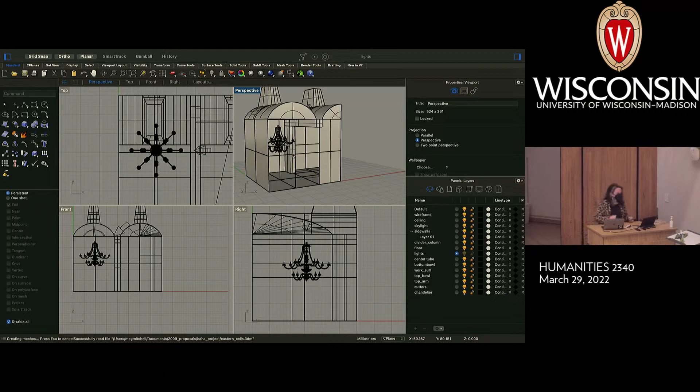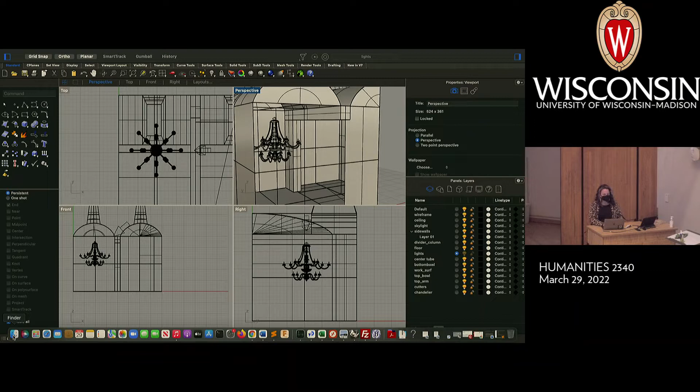So let's get the mood music off. As promised, I was challenging myself to show you all a Rhino project per session. This is a project I did a couple years ago, actually a proposal. I could probably teach a whole class on proposals I've done that never got selected, because that's a huge part of being an artist. You have a ratio of things you send out for submission versus things that actually get picked. You don't get picked to do a large public art commission every day. If you're doing this type of work, you're preparing a lot of proposals and not getting any of them, or getting very few. And even if you're getting very few, you're actually doing really well, because sometimes hundreds and hundreds of people will apply for these opportunities.

So me and my collaborator were interested in doing work that had to do with the Innocence Project, where people find out, many years past a crime, that someone is actually not guilty, using scientific evidence to prove that. So I generated this big chandelier, and I don't think you can see it here, I think I actually did it in post. I strung a bunch of rhinestones from it that looked like they were in the form of a DNA molecule. So anyway, this was the work.

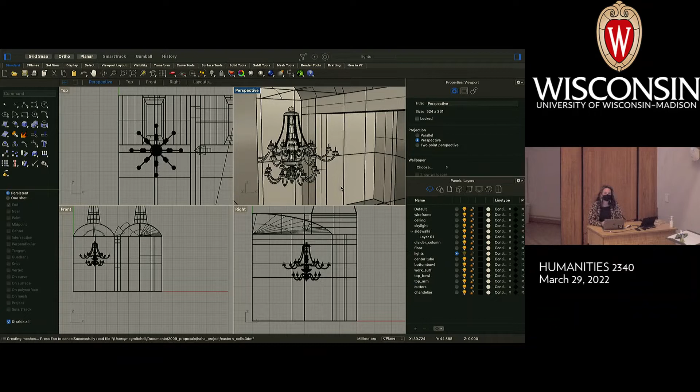It probably took me, well, we actually went there for a site visit to look at the space, me and my collaborator, and then it probably took me another couple of weeks to do this. So is it worth it? Is it not? Gosh, I don't know. I mean, I have gotten some of these projects, and that makes the next ten I don't get worth it. So, yes, a note about rejection.

It happens to everyone.

Today we are going to get into Rhino in a different way. We're going to talk about some broader concepts related to 3D modeling, and then we're going to try them out in Rhino. Then I'm hoping to pivot about halfway through the session and talk about how to make things with freeform curves, which is edging into the next assignment.

So we spent some time last week really talking about how the Rhino interface works. We'll be talking about that the entire time we're using Rhino, because it's kind of just something you have to learn. And then we also talked about the ideas of using solids and modules for your Modules Galore assignment.

So what we want to talk about is just a bird's eye view look at 3D modelers. It's possible that y'all have heard of some of the 3D modelers out there on the market right now. They're apps, pieces of software that you can choose to use. Of course, I don't think Rhino is necessarily the most popular one. It's been around for a really long time. But as I said, one of the reasons we chose Rhino is because it's a little bit lower on the cost and tends to be a little bit better for what we do as a department.

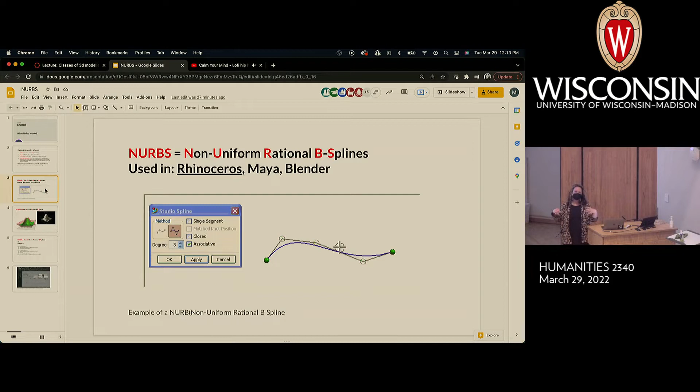So splines actually come from the tradition of shipbuilding. Just to honor that tradition today, I'm going to make a boat in Rhino. No joke, when the Vikings, or anybody else for that matter, used to make ships out of wood, they would set up systems that would use blocks to push the wood in one direction, and wood being somewhat bendy, the wood would eventually comply with that. That architecture used to make wood curved is called a spline. That's your fun fact for today.

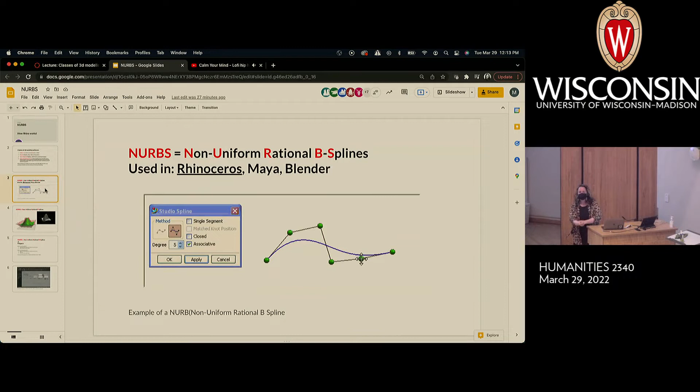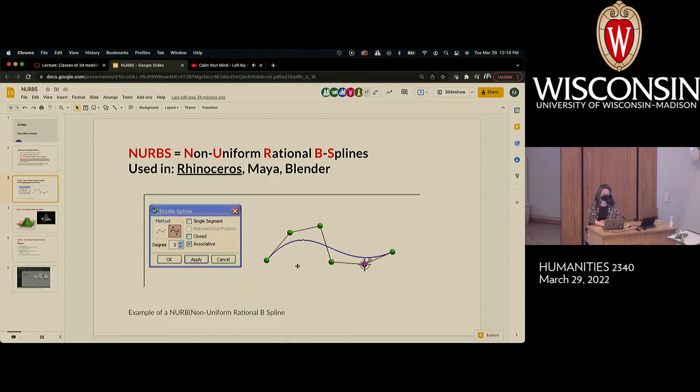So now, everything in the computer world is sort of explained by its relationship to the physical world—at least a lot of things are. So when people took on this project of making freeform curves, they decided to borrow from that physical world approach. And so what you get, as you can see in this slide, are these sort of malleable freeform curves. So that, in a nutshell, sums up NURBS.

There's also another type of 3D modeling out there called polygonal modeling. I'm not going to talk too much about the use cases for all these different models—I just want to go through them, and we'll talk about use cases in a couple of slides. Polygonal modeling is really what dominates the so-called cinematic effects software packages like Maya, 3D Studio Max, Cinema 4D. There's a whole bunch of them, like Houdini. There's literally probably at least a dozen of these software packages out there.

There's also another method called surface subdivision modeling. Back in the old days, 10 years ago, there used to be some apps that would do surface subdivision modeling, which is a somewhat exotic mathematical approach to creating 3D form. But now, I think today it's something you'd see mostly in plugins. I know there's a plugin for Rhino that does surface subdivision, but I'm including it on this list because it's a very technologically distinct way of creating 3D stuff. It's distinct from NURBS, and it's also distinct from polygons.

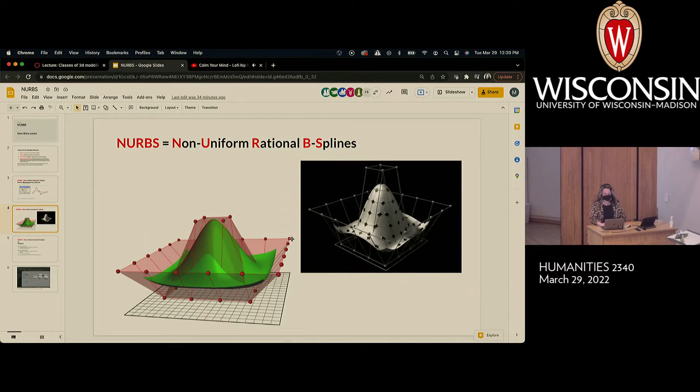So yeah, this is what a NURBS in 3D would look like. So this is a NURBS surface. And you can see it's still controlled by those splines and anchor points, but it's doing that in a 3D way. Let's talk a little bit about what's good for what. Right now, in this class, we're pretty much modeling for the screen. So that's a perfectly legitimate reason to use NURBS.

What are NURBS good for? Well, definitely I would say NURBS are good for anything made to be part of the built environment, short of maybe an actual building. Then you should use AutoCAD, if you're an architect, basically. But if you're just making stuff, building stuff, designing stuff, NURBS is the way to go. Another thing that NURBS are legendary for, and definitely their main function, is that they're ridiculously accurate for smooth surfaces. And I'm going to demonstrate why in a few seconds.

So what are polygons used for? What are they good for? Polygons are really good for rendering quickly. And I'm going to say something that is a little cheeky here, but that's about the only thing they're good for. No, that's not really true. They're great, obviously, for games, for video effects, basically anything where you need the computer to mush through the 3D data really quickly.

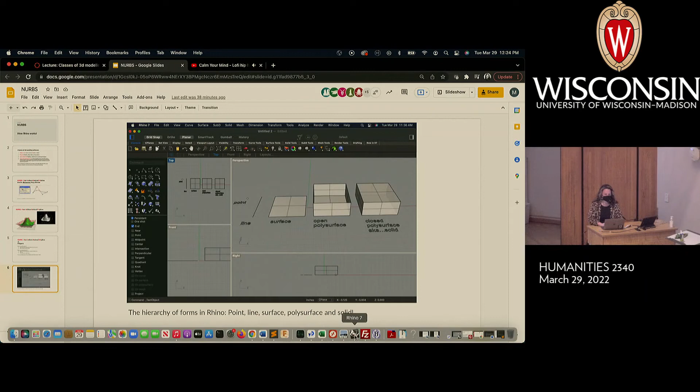So let's jump into Rhino. Excuse me, I don't know why I'm opening. So let's talk out the hierarchy of form, and we'll also talk out some of those format issues that I brought up earlier.

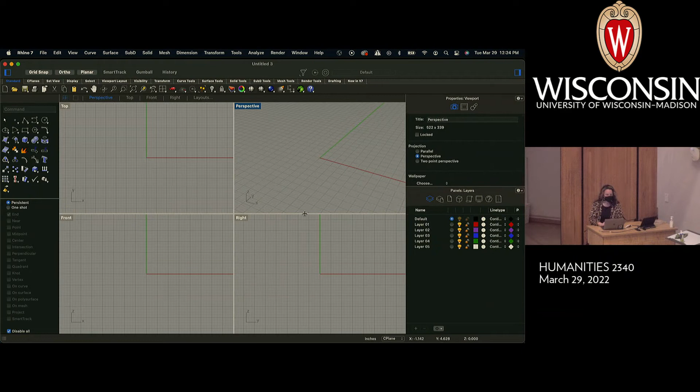I'm going to jump into my 4-viewport layout here. I can start by drawing a line. We all know about the line. I could start with just a flat line or a polyline. Actually, I think I'm going to jump straight into the curve, just because it'll get things done a little bit faster and curvier. So I'm going to make a single line here.

And you can see right now my setup is in ortho, so I'm constrained. That's okay. Pro tip, if you hit the Shift key, it will temporarily turn off ortho. I tend to keep mine like that because I work a lot with right angles. If it doesn't seem important to you, don't worry about it. So if I hit the Shift key, it allows me to go anywhere. And I'm going to just draw a couple of points.

The curve tool can take some getting used to in Rhino. As you can see, you're actually drawing the control points, not the points on the line themselves. So you have to anticipate where the line is going to go. It's not super hard, it just takes a little bit of getting used to. So making some line drawings by yourself is probably a good idea.

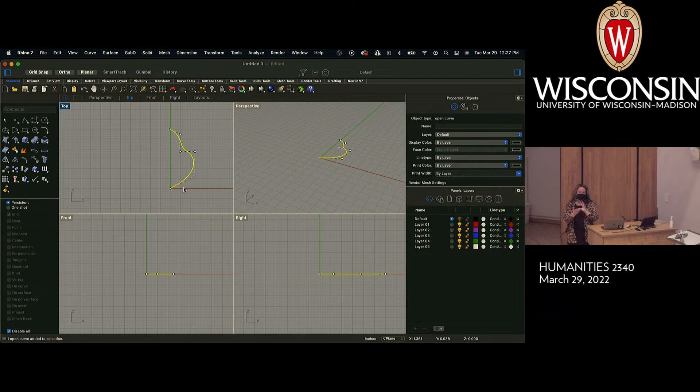We're going to take this line and use a method that turns it into a surface by spinning it. If we had this point over here somewhere, it would create an open surface. But as it's set up right now, where those 2 points are on the same axis, it should generate a closed surface. So up here in the menus at the top of the screen, you can see there's a curve menu, a surface menu, and a solid menu.

Those are like your go-to menus for basically making stuff in Rhino. They're going to have most of the functionality that you need to model stuff. So right now we want to probably go to the Surface menu because I had mentioned just a second ago that I wanted to make a surface. So if a surface is what you want to get out of the operation, you probably will want to try the Surface menu. It's a good rule of thumb.

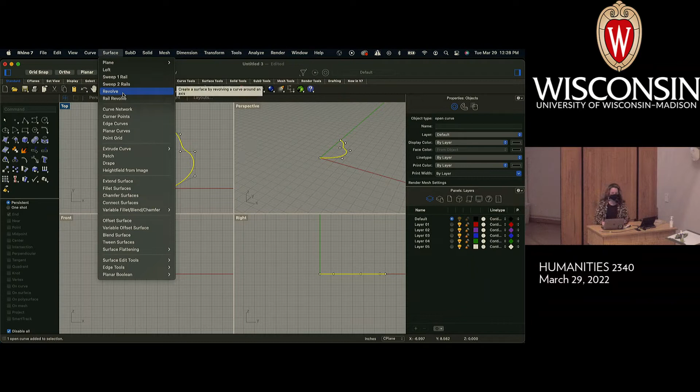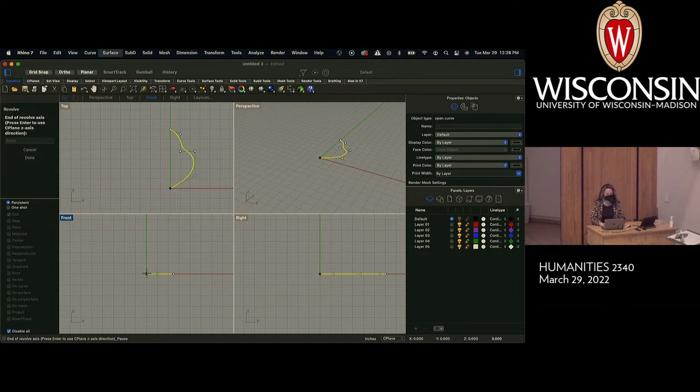I'm going to use the Revolve method, okay? So with the Revolve method, you basically define the start of the axis. In this case, I think actually the front viewport is where I want to define the axis. So I'm going to click on this point right here. Now that's the start of the axis, and then the end of the axis should probably be somewhere over there. And that's because, as I pointed out to you, I put those 2 points lined up to each other, anticipating that I would whoosh that around in that direction.

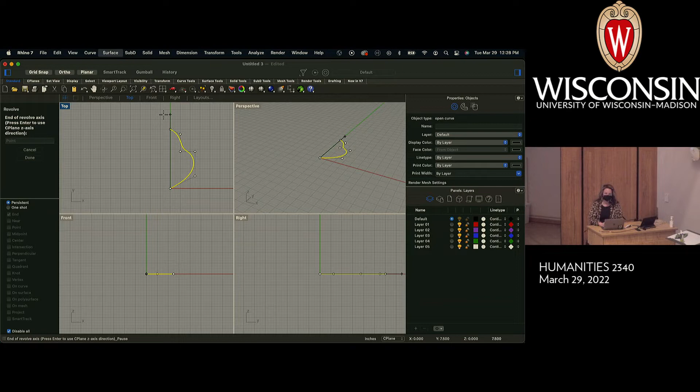Can we do it in other directions? Absolutely. Interesting things will happen. But let's do it the uninteresting way first. So then, after I have a start and an end to the axis, it asks me for a start angle. You can do a revolve partially and make it just like a fan or a shell. We actually want to do a full circle, so I'm going to click the full circle box here. And you can see it did something.

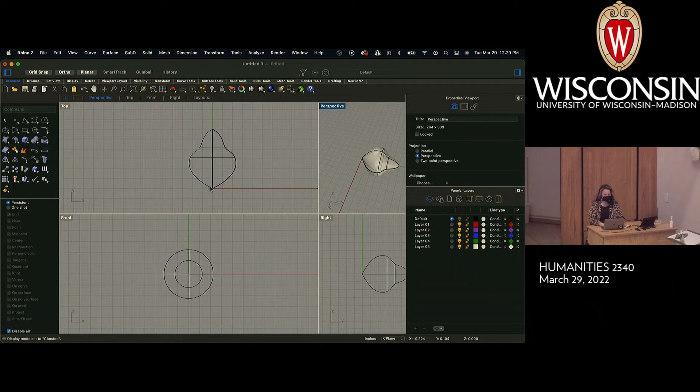Now, I can't tell exactly what it did because I have not set up my viewport yet, so I'm going to hit Control, wait for the menu to come up, and select a more shaded viewport. So that's cool, fantastic. So this looks like we've jumped straight ahead to a closed polysurface. I'm going to go ahead and make this as an open polysurface just to show you, or an open surface, rather.

Oh, by the way, did everyone see how I didn't like how that point was coplanar to the end point down here? And how did I do that, everyone? I clicked it, and I dragged it. So it's that easy. Any point on a curve line, you can manipulate post drawing. I deal sometimes with students who have a lot of anxiety about the curve function and not getting it right. And my advice would be, don't bother getting it right because you can just move the points around after you make the line, and then you can get it exactly the way you want.

When you're in the middle of an operation in Rhino, it's not a great time to go back and question your actions. Rethink your life, maybe. I don't know. So let's see.

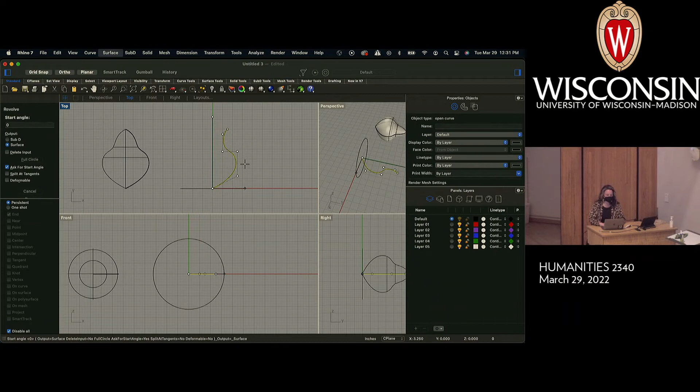I'll just do the Revolve method again here. And again, it's asking me for a start and an end axis. When I'm doing these start and end axis functions, it's a really good time to glance at all 4 viewports and just make sure that it's here, here, here, here. Because obviously, if it's not where you want it, it's not going to turn out the way you like. And so in this case, I can also do a full circle here. And so now this has produced an open surface.

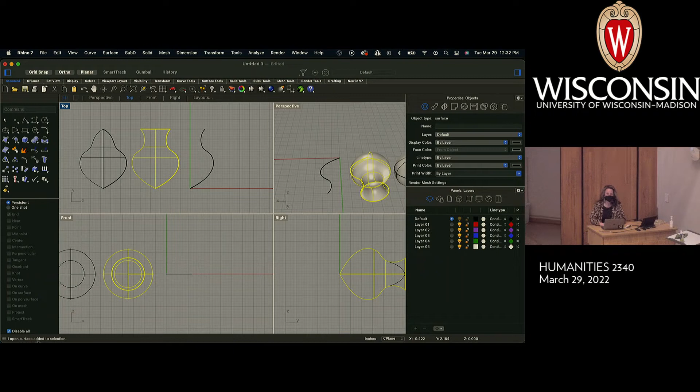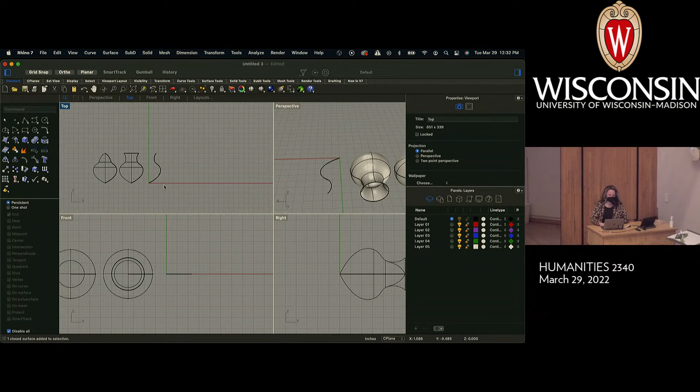So if I go to select both of these things, it says 1 curve, 2 surfaces added to selection. That sounds about right. Sometimes this will say whether something is an open surface or a closed surface. And so if we click this individually, it is reporting back that it's an open surface. So this little readout down here can be a good tool to just know what you're dealing with. OK, so now we've got a point, a surface, an open surface, and a closed surface. So that is that.

And now we're going to take it 1 step further, and we're going to think about these as objects that we would like to 3D print. So that is going to involve a couple of things. We're going to go into the Mesh menu. And as you guessed it, the Mesh menu is where you will find most of the functions in Rhino related to polygons.

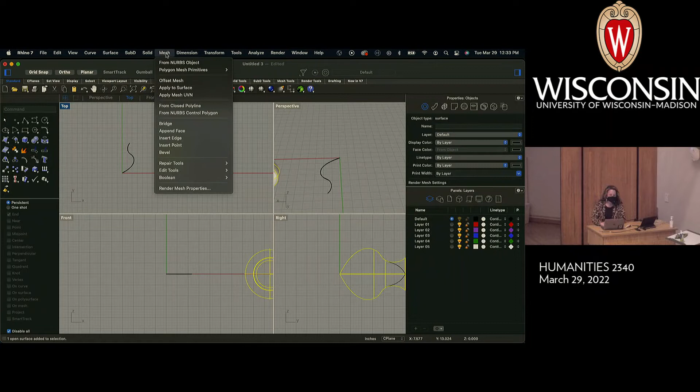As I said, is Rhino great at dealing with polygons? No, not really. But it's fine for certain things, and this is one of the things it's OK for. So we're going to basically pretend that we're making a 3D print. And I can go ahead and just make a mesh right here in Rhino. This isn't exactly the workflow that we would use if we were 3D printing, but we'll go ahead and go with it.

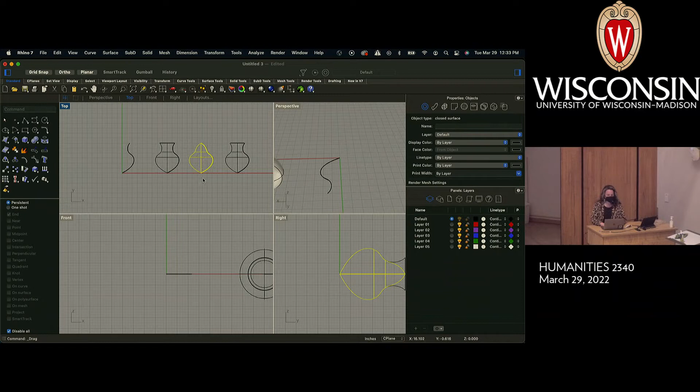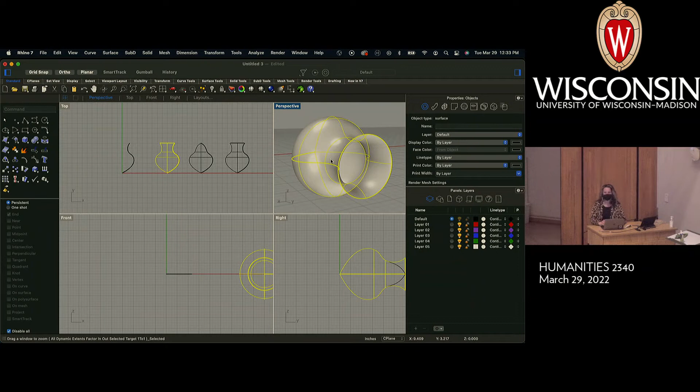Now, fun fact, this open form that's a single surface. Let me do my zoom selected thing again. OK. So is this form 3D printable? No, it's not. I can certainly show you how to make it 3D printable, but 3D printable objects have to have a thickness, and this is literally just one surface that doesn't really have any mass. And that's because it is an open surface.

This one that's closed, can we 3D print this one? The answer is yes, because it's fully closed around itself. I will promise, actually, to come back to making this 3D printable on a different day. I think we kind of need to work up to that a little bit with some of the other tools in Rhino. So I'll save this document, and we'll come back to it.

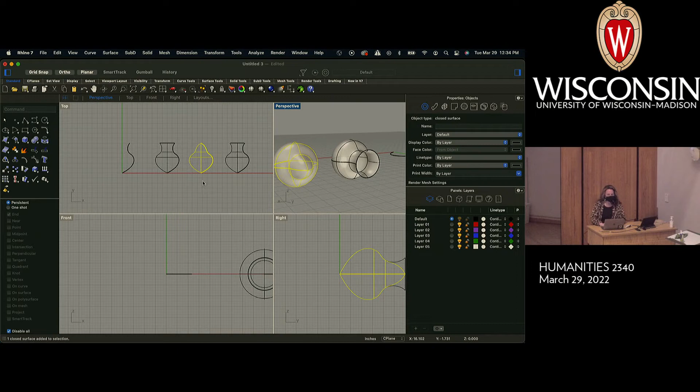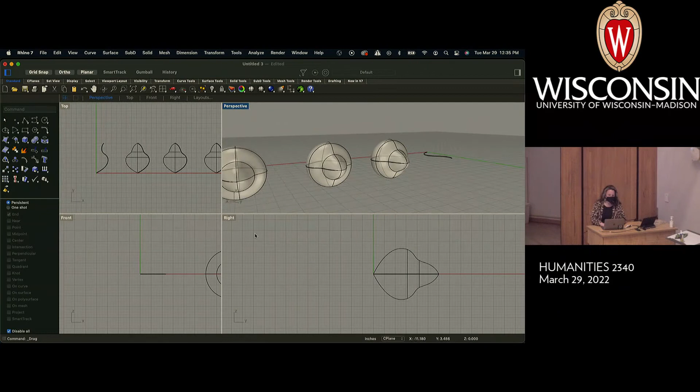So that being said, for my comparison test here, I'm going to favor the object that is 3D printable. And I'm just trying to get maybe 3 of these on the screen at once. And I don't think we need that. So what we're doing over here is we're basically going to convert these into polygon meshes. I can just click on any one of them, go to the Mesh menu, and say From NURBS Object. So I'm basically asking it to make a mesh.

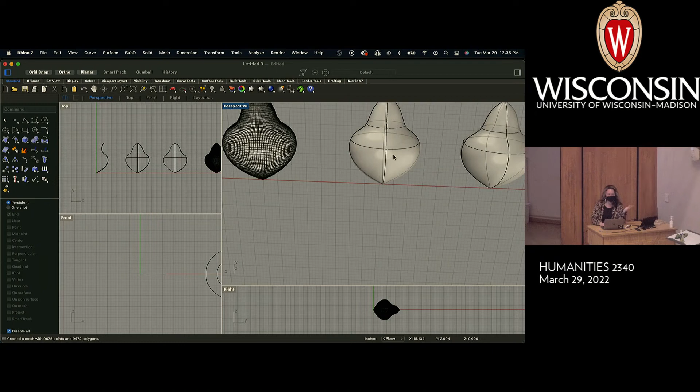I can hit preview here, and it gives me this really sophisticated slider, fewer or more polygons. Sorry, that was sarcasm. So this is what a high polygon model would look like, pretty much what you could expect for a high poly model. And by the way, if you 3D printed that, it would probably look beautiful. Let's do a different version of that and maybe make this one even lower. So then we get our low poly models.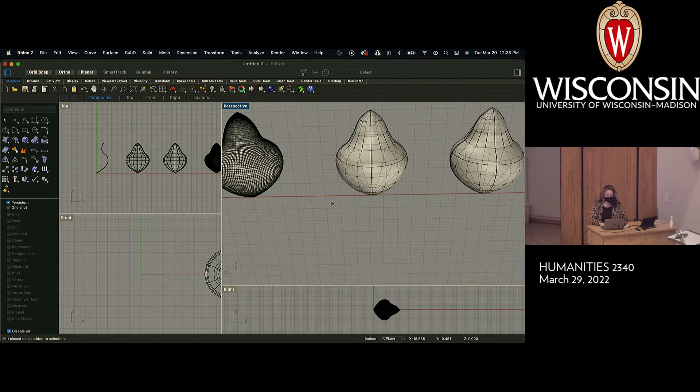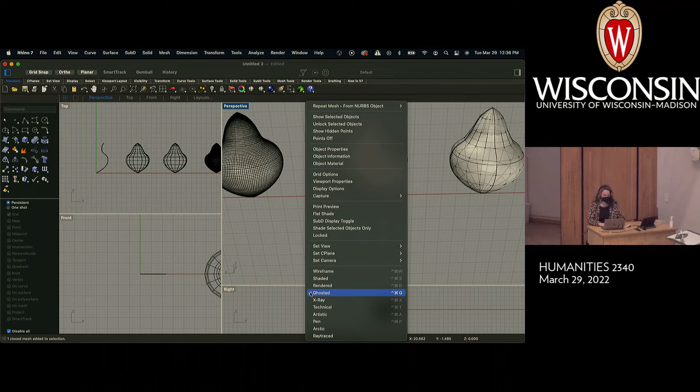And just to be perfectly clear, there is nothing wrong with a low poly model. It's got a certain aesthetic. Low poly models and things that look low poly seem kind of cool. It's a whole aesthetic, like a lo-fi aesthetic. It doesn't bother me personally if I see low poly something. I don't think it's low quality or anything like that. But it has a very different look. And particularly in my role as a professor, I feel like I should tell you what the difference is and how you would be able to see it.

So in order to really see the difference here, I'm going to go into the rendered viewport. You can see here the high poly model is gorgeous. It looks like this beautiful, uninterrupted surface. You can't tell where the polygons are. That is good. This is less good. Which isn't to say that it's necessarily bad. It's just coming in with kind of artifacts, artifacts from the process.

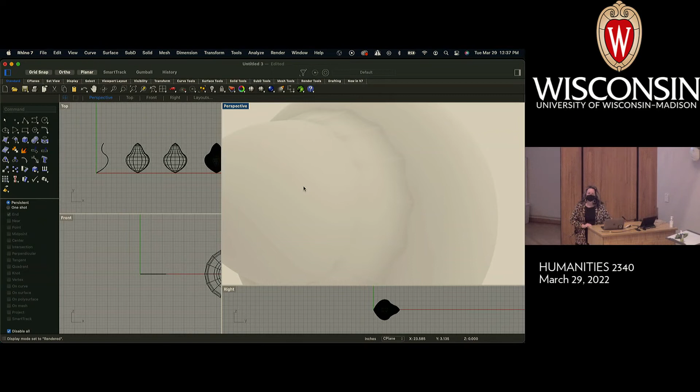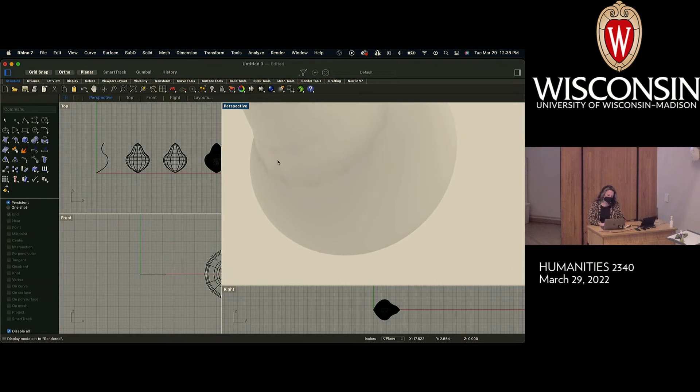Some artists really like that, and some people are really into that. But it definitely gives you a different way of looking at the whole shape. And I think if this were 3D printed, you would even start to see some lines come up in this area. But certainly this transition zone is kind of a mess. So that's basically, in a nutshell, the difference between low poly and high poly.

Now, if I wanted to take this high poly mesh and 3D print it, I could go into Export Selected. By the way, you can get an extra credit point for 3D printing something. So you could submit this to Shapeways and get your extra credit point. So we're not going to export it as a 3DM model. We're going to export it as an STL file.

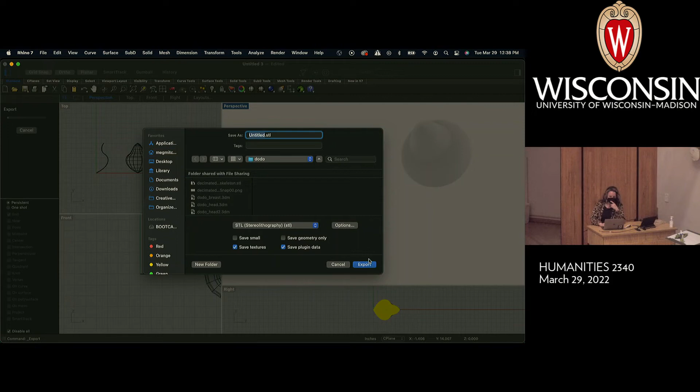And keep in mind also, y'all, that I did file export selected, so it's not kind of bringing all the other trash from the file. And then you basically just hit export. Super easy. And then you'd be done. So

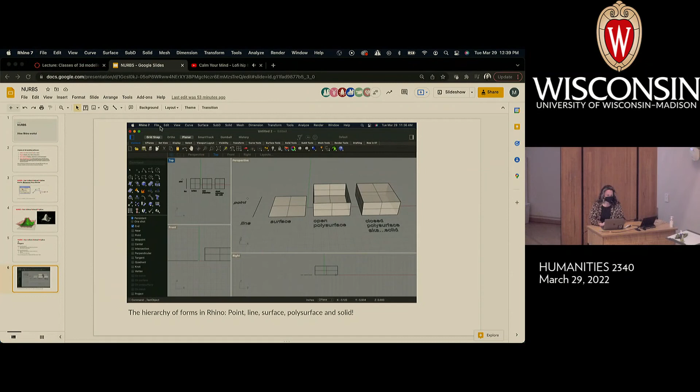let's kind of shift gears a little bit. We got a chance to talk about the Revolve method, which is a really great and powerful kind of way of making things in Rhino. Let's talk about a couple of other surface construction methods.

And so what we're going to start doing is making stuff that could potentially go into an environment. This is obviously geared towards the next two assignments, but also more generally, we're going to be reviewing a ton of different techniques in Rhino. So probably the next evolution of what we're doing, going beyond making solid shapes from these prompts, is to really start thinking about using line tools and creating custom surfaces and really getting into the stuff of Rhino.

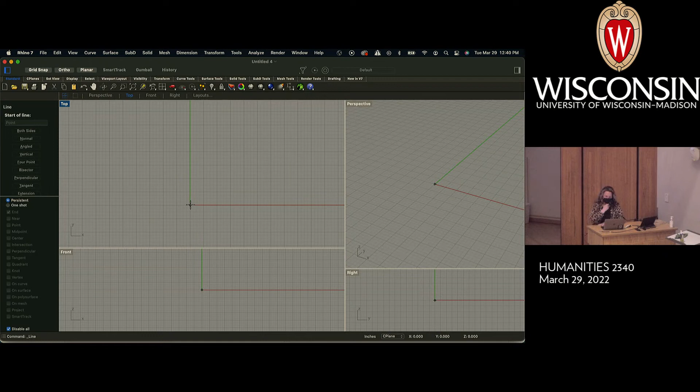So I'm gonna make a boat. And I think I'm going to use the 0, 0 origin for now, just as a point to anchor the whole thing. So I'm going to make a couple of lines just for my own sanity. And these lines are basically describing to me where I want some of the key elements of the boat.

So basically what I just did is I marked a center line to mark out how long I want the boat to be. And then this would be not the width of the entire boat, but the width of the back. So not strictly necessary, but something that I wanted to just do for myself.

So now I'm going to make a control point curve, and I'm going to define a couple of things. I'm going to define the side of the boat, and I'm also going to define the bottom of the boat. Like there's maybe a ridge on the bottom of the boat. So I'm just going to draw a couple of control point curves. I'm in ortho mode. That's annoying. I can hit the shift key, or I can just turn off ortho, maybe.

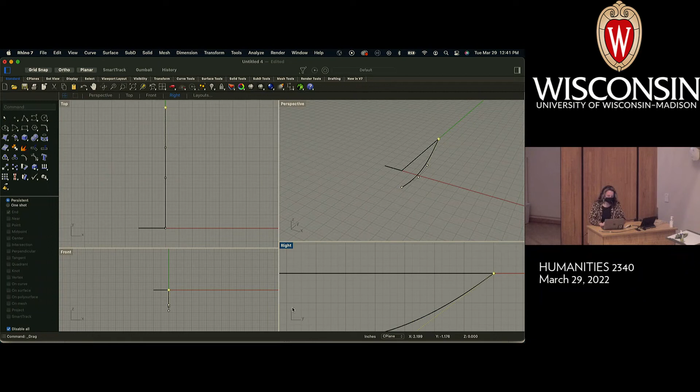Maybe there and there. Again, I'm not going to get too obsessed with this because I can always change it later. And in fact, I can see here I probably might want to change this. I kind of wanted this to do that. And so that would basically be the bottom of the boat, the part that drags on the seaweed. And then the side of the boat, we'd see from the top view, it would look something like...

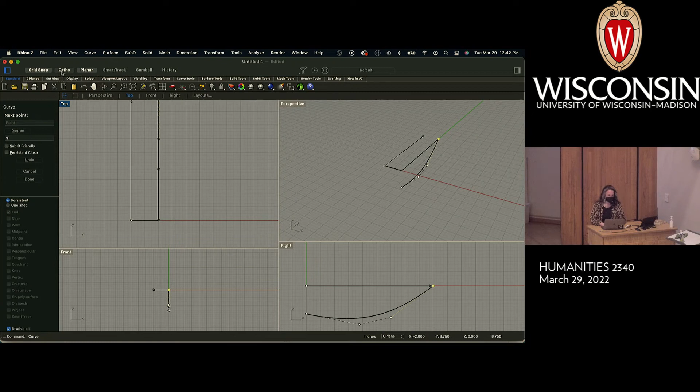Notice, by the way, that I have all my object snaps disabled. If you're lined up with the grid, then in this case, I don't really need them. I will turn them on soon, probably. And again, I'm in ortho. I'm going to turn it off because I am making a boat. They're not known for being rectilinear objects.

And so put that curve maybe right there. That's looking a little bit like a speedboat. I kind of want to make it more like a tugboat. So that's a little stouter maybe. Okay, so now I'm just still marking out my territory.

Oh, by the way, somebody asked me after class, I think on Thursday, if I ever modeled or drew in the perspective view. And I would say, not really, no. I'm a sucker for the front, the right, and the top. You certainly can use the perspective view to draw lines and stuff, but you'd have to have your object snaps working really well. Otherwise, the cursor has a tendency to migrate backwards and forwards a lot. So if you're struggling and you've been working mostly in the perspective view, you might want to consider backing off of that.

Okay, so now I'm going to go ahead and make a back piece to the boat, which we need before we go any further. So this is the part where it might be a good idea to bring my object snaps back. So I'm going to enable my object snaps. And the reason is because I actually want to snap to something. And in this case, it's the end piece here. If I went into the front view, you can see it's obscured by the other part of the boat. So here, the object snap is actually kind of useful.

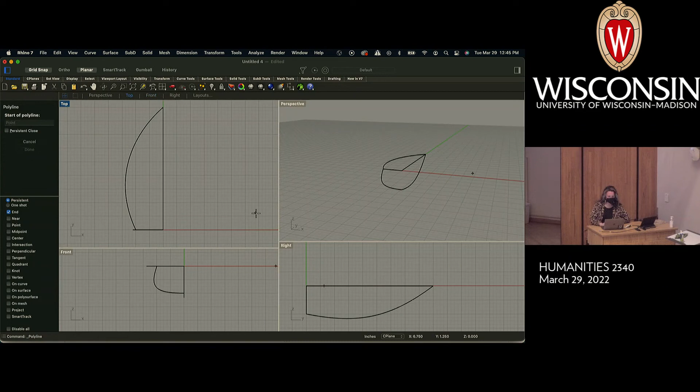One last thing before I continue, I'm going to draw a line that goes from here to here. Probably not strictly necessary, but it's a good idea. Again, I'm really relying on those object snaps here to get things done.

Okay, so now I'm going to use a couple of methods. You may notice, Meg, that might only look like half a boat. Yes, it is a half a boat. Why am I drawing half a boat? Because it's a lot easier to draw half a boat than a whole boat, and I can flip it to make the other half, because boats are generally symmetrical. So that's why I'm doing that.

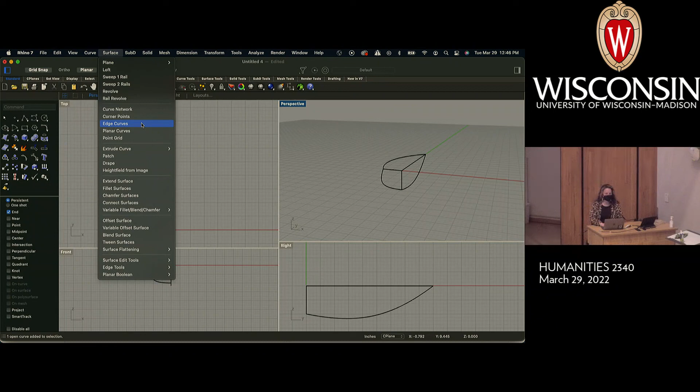So I'm going to use some of these surface creation methods we've talked about. One really great surface creation method is the edge curves method. Basically what edge curves wants as input is 2, 3, or 4 open curves, so it's a good method to use when you don't exactly have things tied down. Here it says select 2, 3, or 4 open curves.

So I'm going to select this one - nope, not that one. This is where this becomes useful. I actually want the bottom one, because that's the bottom of the boat. I can still select a couple more - I definitely want this side piece in there. That should be all we need, actually.

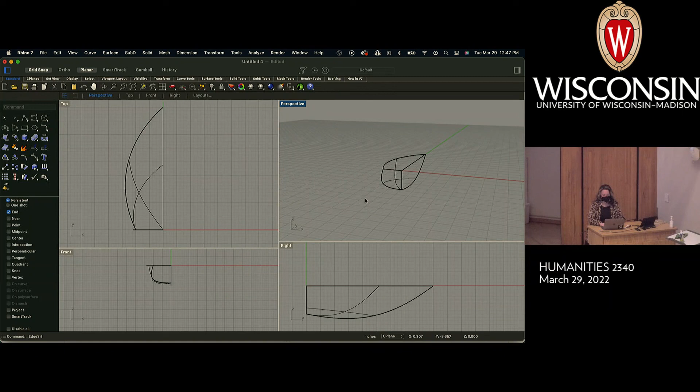So let's see how that goes. Oh, hello. Let me turn on my ghosted viewport here. Well, hello. Hello, freeform curved surface, nice to meet you. So yeah, basically we just made this surface.

Before we mirror this, I want to fill in this back area. I think this is also going to be a great case for an edge curves treatment, because it has... edge curves. If we wanted to try it a different way, we could take these 3 open curves.

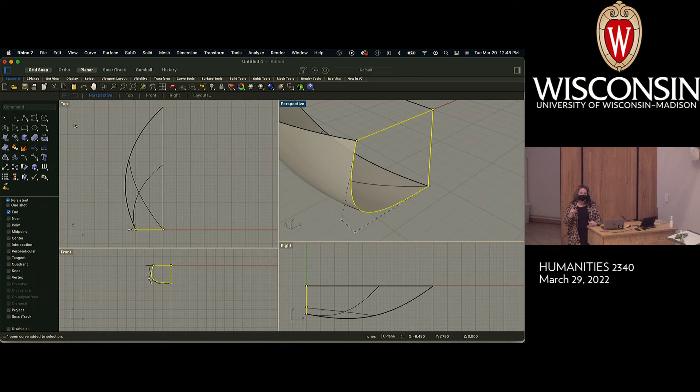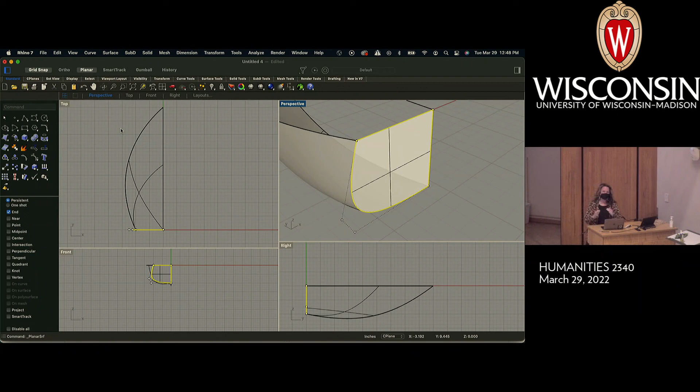So I'm going to select them. You may notice something about these curves - they have one thing in common: they are all on the same plane, they're coplanar. Because of that, we should be able to use another one of my favorite curve surface generating methods, which is planar curves. Planar curves will basically take any group of flat shapes and fill in a surface. I'd argue it's probably my most used surface creation method, maybe just because of the way I work, but it's super powerful.

Okay, so now we've got this stuff, and we can just grab these 2 surfaces, and I can use one of the transform methods, which is mirror. It asks you for the start of the mirror plane and the end of the mirror plane. Now, the start of the mirror plane - this point seems absolutely important to me. Yeah, it is. It's a really great way of defining where we want to flip things on. So we'll go ahead and click that.

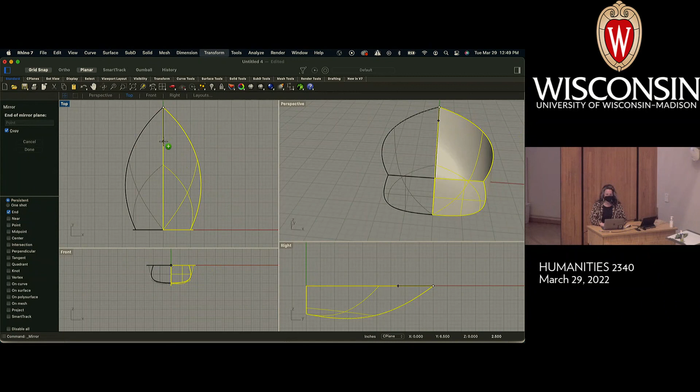And then as far as the end of the mirror plane, basically just wherever it looks right. Although hopefully if you've built things straight, you can snap to that 90-degree plane, and you're in.

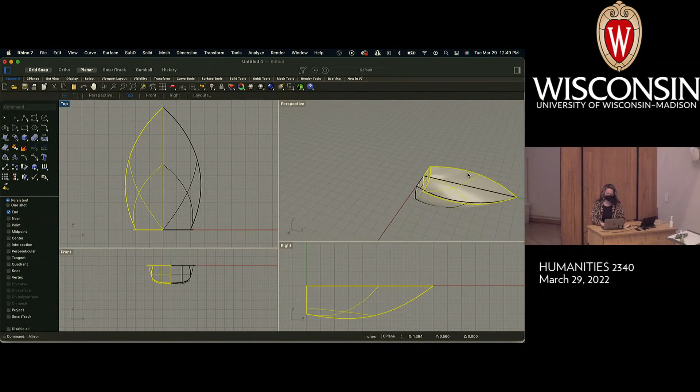And so now, wow, with 1 minute to spare, we have a boat. We still need lots of detail in our boat - we need a cooler, we need a bench, I think I'm going to give it a mast. Yeah, we're going to have some fun with this boat, and maybe even some creature features.